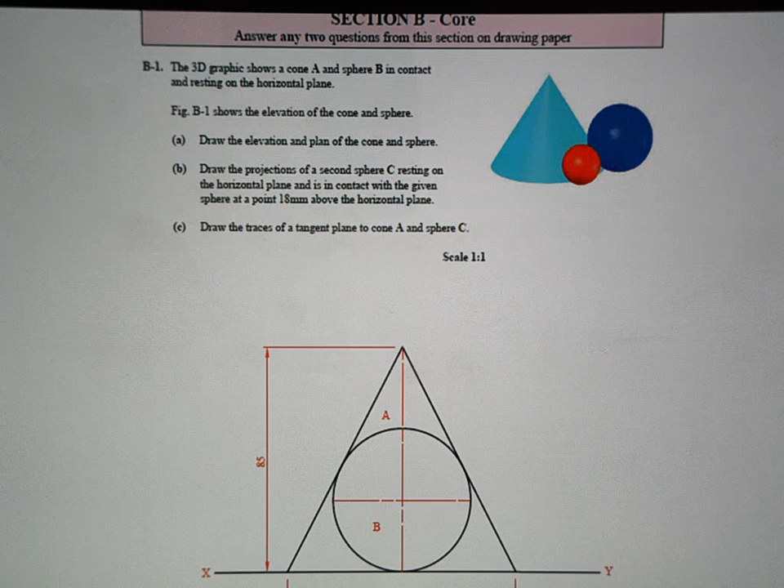Okay, just taking a look at this solids in contact question. It was one of you requested it on Edmodo, so I'll have a look at it now. You're given the elevation of a cone and a sphere B, which is directly in front of it. The elevation is given, measurements are given, and you draw a plan view from that. So part A of the question is pretty straightforward. The query related to part B and part C, so we're going to take a look at those now.

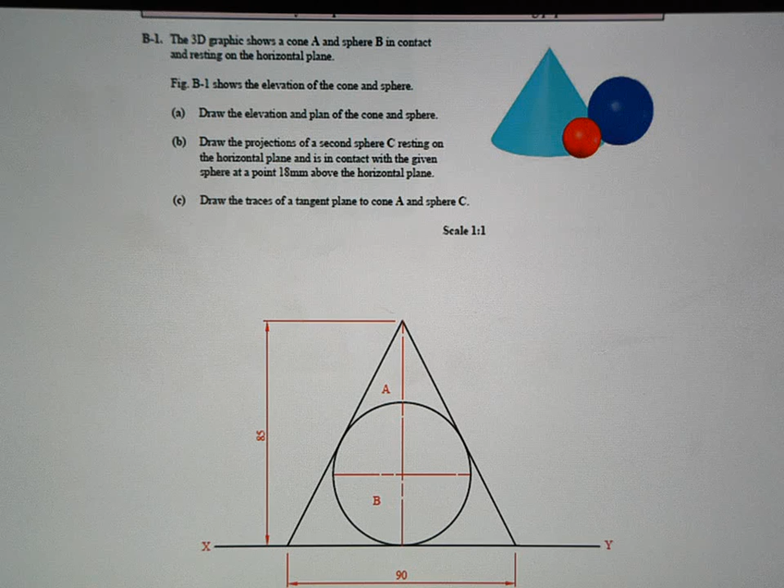So in part B, what they're asking you to do is to draw a second sphere resting on the horizontal plane. Now, when it says horizontal plane, that means it's resting on the ground. So this has to be on the ground, the sphere that we draw. And then the other criteria put in place is that it has to be in contact with the given sphere, which is the larger one, at a point which is 18 millimeters above the horizontal plane. So 18 millimeters above the ground.

So this is the third sphere we're going to draw, and it has to be in contact with this one, and those two have to be in contact with each other at a point which is exactly 18 millimeters above the ground. Now that doesn't necessarily mean that the radius of the sphere is 18 or anything like that. It just means that the point of contact is 18 millimeters above the ground.

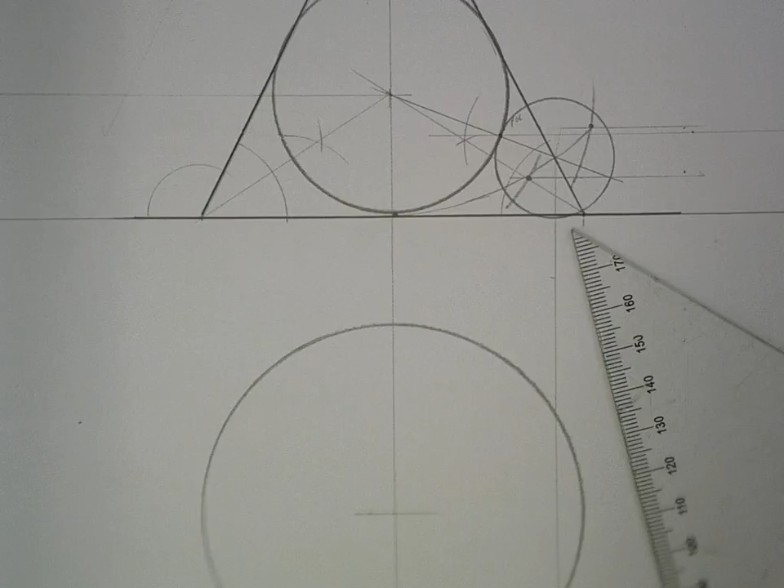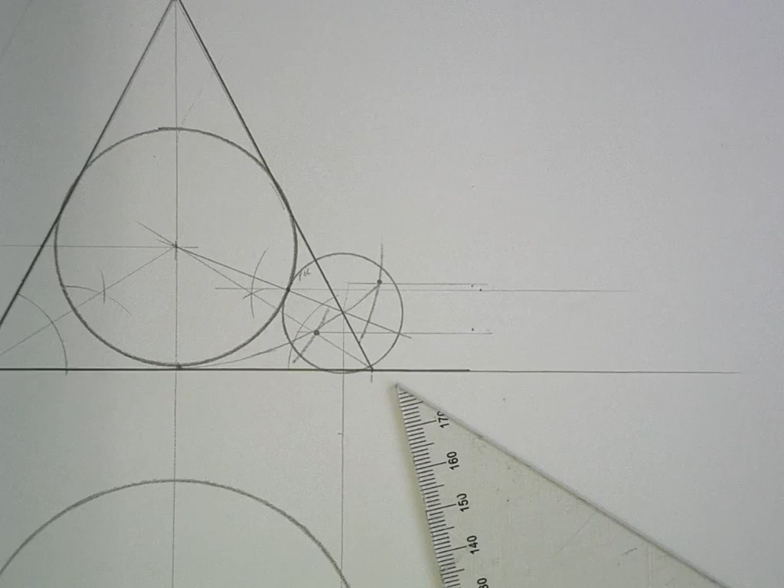So what I've done is I've drawn out the question, but I'm just going to go through it slowly now. So the initial setup should be okay for everyone. Drawing the existing cone and the larger sphere, which is perfectly lined in front of it. And now I'm going to focus in on putting in the extra sphere, the smaller one. So I'll focus in on the elevation. Okay. So what I've done is I have measured 18 millimeters up from the ground line, made a mark, and put a line across.

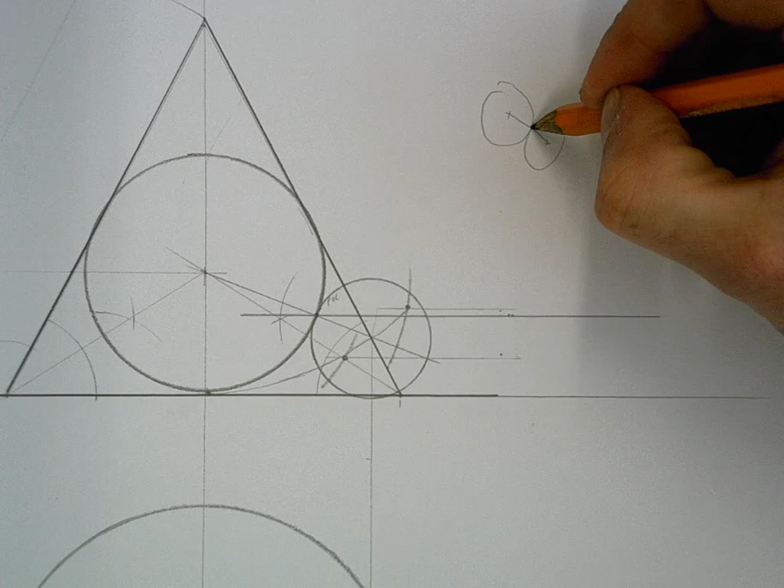Now, where that cuts through the edge of my existing sphere, that's the level at which the sphere that I'm going to draw has to be in contact with it. And when you have two circles or two spheres appearing to be in contact with each other, you find the point of contact by joining the two centres together. Okay, so that goes back to junior cert graphics. So what I have in this case is I have the centre point of one of the spheres, and I have the point of contact.

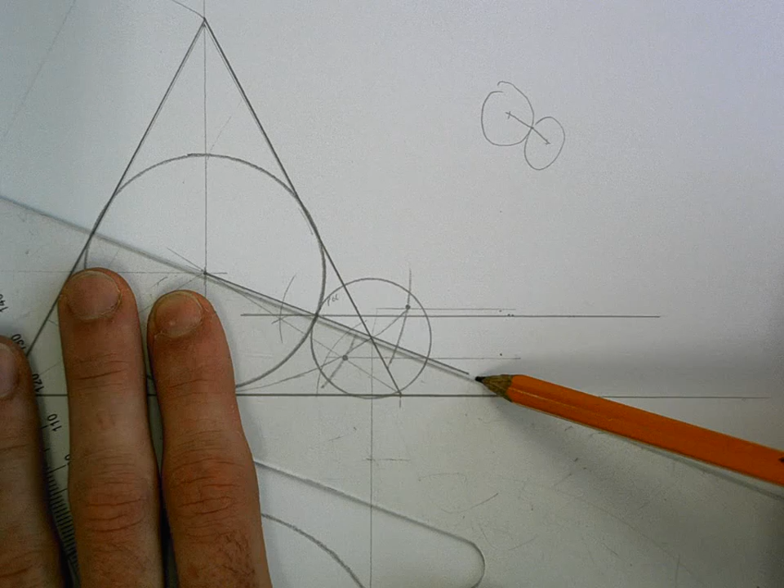So I'm going to draw a line going through those two, like so. Now what that means is that the centre point for the other sphere has to be somewhere along that line. So we're going to try and find the centre point of it. All we know about it for now is that it's along this line somewhere. Okay. What I've done then is I've created a loci. Now a loci is basically just a path that centre points can take.

So I've started off with the radius of the existing sphere, and I set that. Now what I did then was I added 10 millimeters onto that measurement. So when I brought it out by 10 mil, I struck an arc. And at the same time, I measured up 10 millimeters from the ground and drew a line across, and they intersected each other. So that would be one possible location for a circle or a sphere that will be touching the ground and touching this sphere. But it's not on the line that I want, so I'm going to keep going.

So I'll take a series of samples, and then they'll begin to create a path or a profile for it to go in. So then I go back to my sphere. I added 10 on the last time. I'll add on another 10 and strike another arc, and this time measure up 20 from the ground. Draw that line coming across. Now again, that can give me a sample centre point. If I drew a sphere from there, it would be in contact with the ground and with the sphere I have, but it wouldn't be in contact at that particular point, the line that I want.

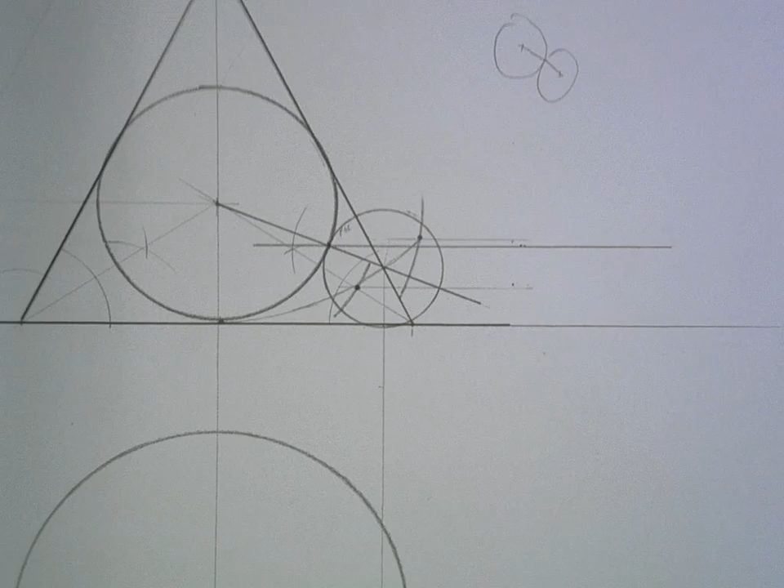But what I can do is I can create a path between those two, starting at the base here and just curving it around, and that path is known as a loci. Now that loci that I've drawn crosses over the line that I need my centre point to be on. So that finds it for you in elevation. So that's my centre point, stretch it back to where my point of contact is, and draw the elevation of your sphere. Then to bring that down to plan view, I just drop down the centre. I put them touching side by side.

But you could, if you needed to, you don't have to in this question, but in some other question you might have to maybe take that as a sample position and then move it back towards another shape. You didn't have to do that in this question, so I just put them side by side. Okay, so that completed my plan view for me.

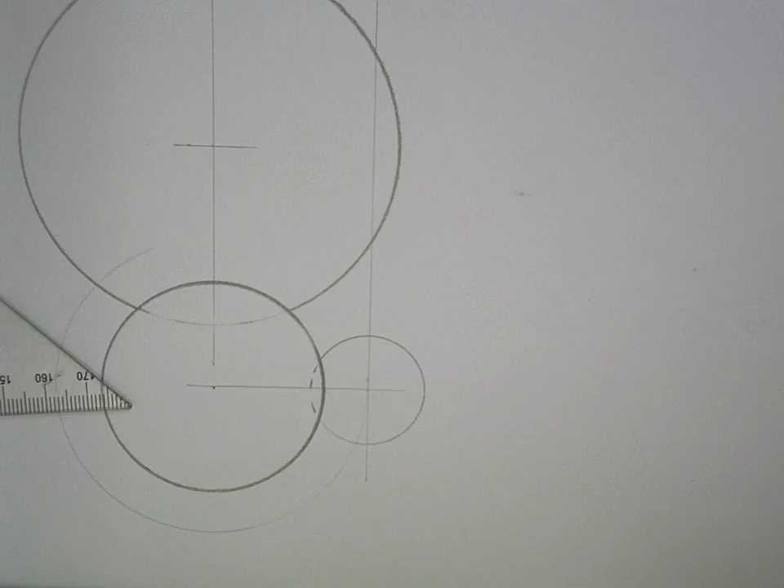Now to go back to the question, looking at part C, which I have to go through as well. So we look at part C of this question. What they want you to do is to draw the traces of a tangent plane. Now a tangent plane just means it's touching against whatever they're going to specify, so it's the same as we're usually working with. We're looking for a horizontal trace and a vertical trace.

And the two shapes that we're dealing with are the cone A, which is the original cone, the large one, you can see it here, and sphere C, which is the one that we just drew. Now just another pointer before I go and answer this. You obviously need the answer from part B to attempt part C, because you need sphere C.

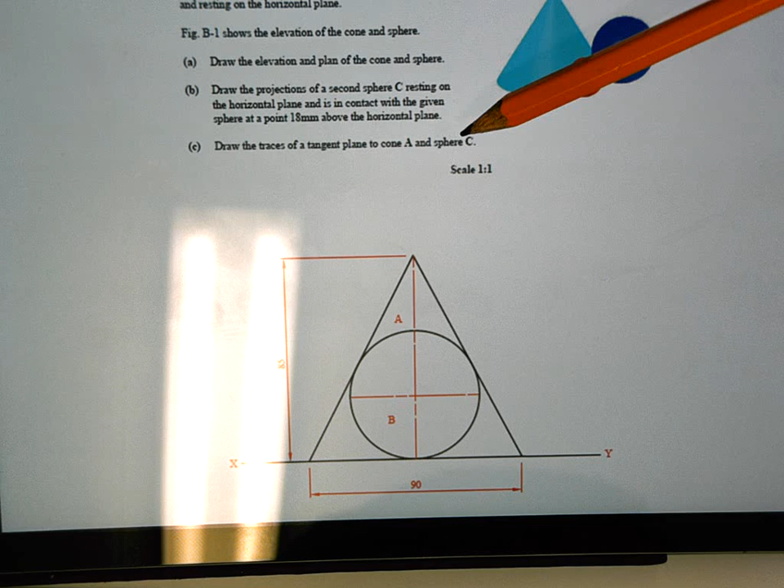If you for some reason weren't able to figure out part B, you would just put an estimate of what you think it would look like, carry on, and then if you get the procedure for part C correct, you still get the marks for part C. So if you're ever stuck like that, just make an estimation of what you think it should look like, continue on, and you might still get a good bulk of the marks.

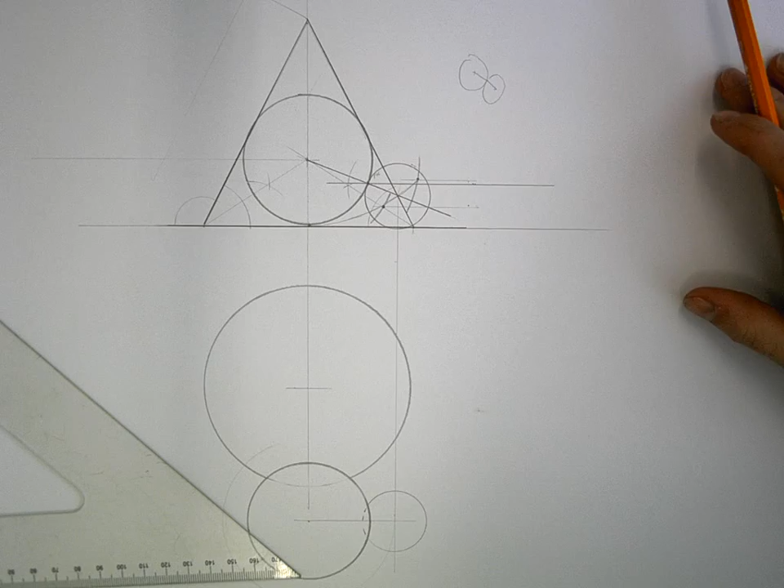Right, I'll just zoom out for this because I want a view of both elevation and plan. Now the procedure for this is quite simple. What we're going to do is try and put a cone over the sphere that I have, because if you have two cones, it's quite easy to rest something against them, and what we want to do in this case is rest a plane against them, and we can get the traces of the plane after.

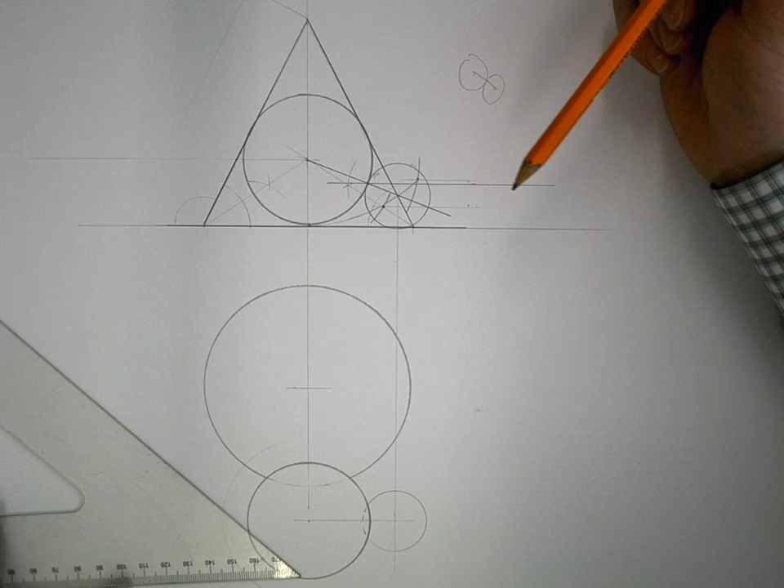So what we'll do is take the sphere C, the smaller one here, and we're going to put a cone which has the same angle as my existing cone on top of it. So all that's going to mean is, in elevation, getting the angle of the cone, the pitch of it, and just sitting it on top of that sphere that I have. Okay, and we go in both directions, just so you understand what I'm trying to do.

So now that I have two cones, it's going to be very, very easy to rest a plane on top of them. And it'll be in contact with the sphere because the cone that I drew is just tangential to that. So when I put the plane on top of it, it'll still be touching the sphere. The cone is just an imaginary thing that we put in to help us get the angle right.

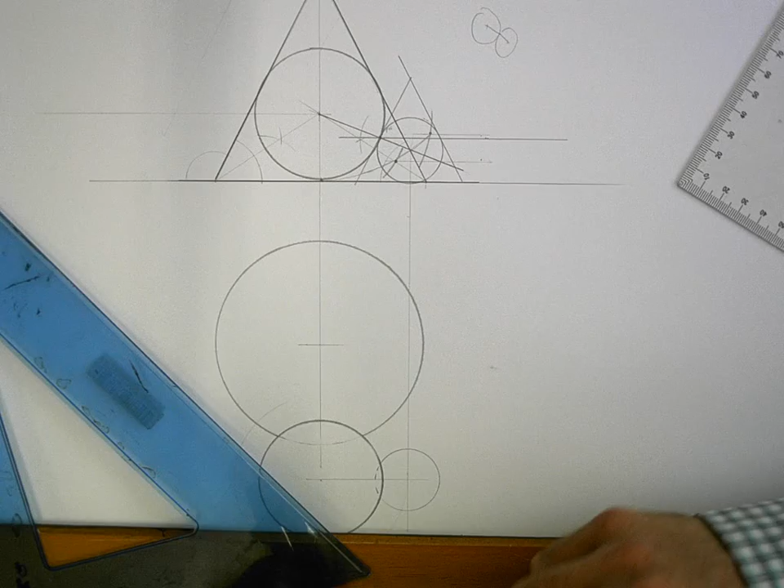So what we'll do then is take the cone that we've just put over this sphere and bring it down to plan view and draw it down there. Now as you know, a cone in plan view just looks like a circle. So get the radius of your cone on the ground and have it sitting on top of that sphere down in plan view.

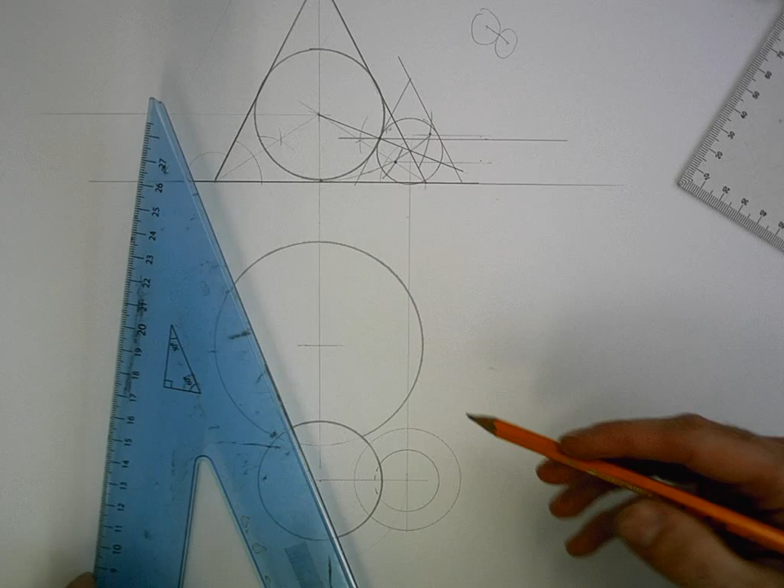Now when you have two cones and you rest something against them, the horizontal trace is just going to be tangential to the two cones. So I could do a horizontal trace going in that direction, probably the most sensible way. Or you could also put one going up that way. Okay, it wouldn't make any difference, to be honest. I'll just put it here to keep the drawing tidy. So I'm tangential to the edge of both of them on the ground. That's my horizontal trace.

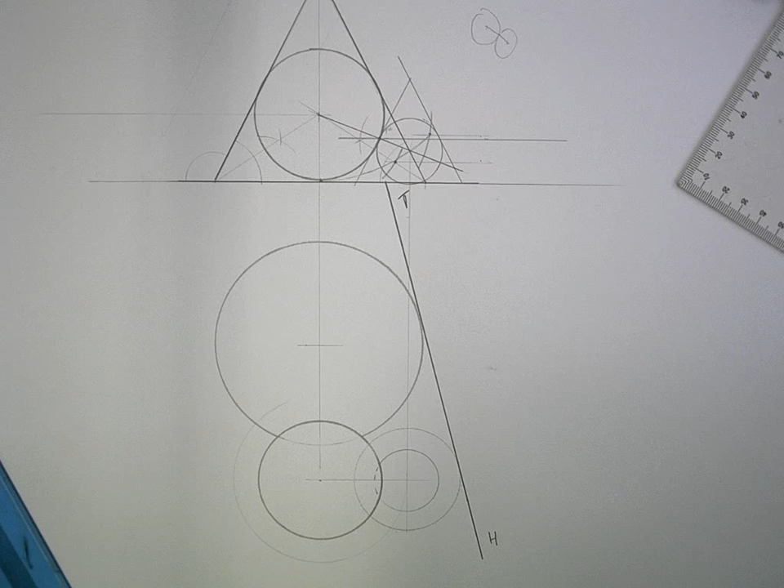The vertical trace is found, as we always do. Once you get your horizontal trace, go to the highest point of what you're talking about. So in this particular case, we're talking about two cones. One of them is higher than the other one, so go to the highest point here, the center point of it, and replicate the angle. So that's my horizontal trace angle.

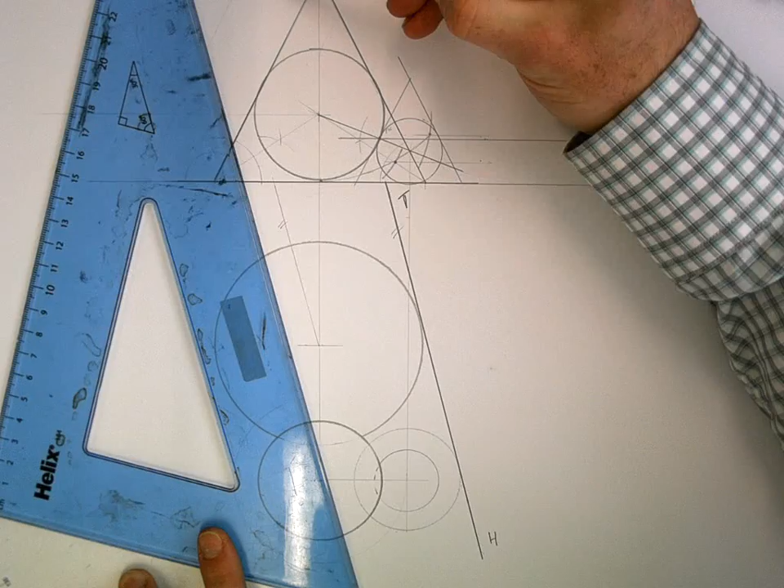Slide it over. That's it, replicate, so they're parallel to each other. And then just bring that up and take a height reference over from it. And that is the vertical trace.

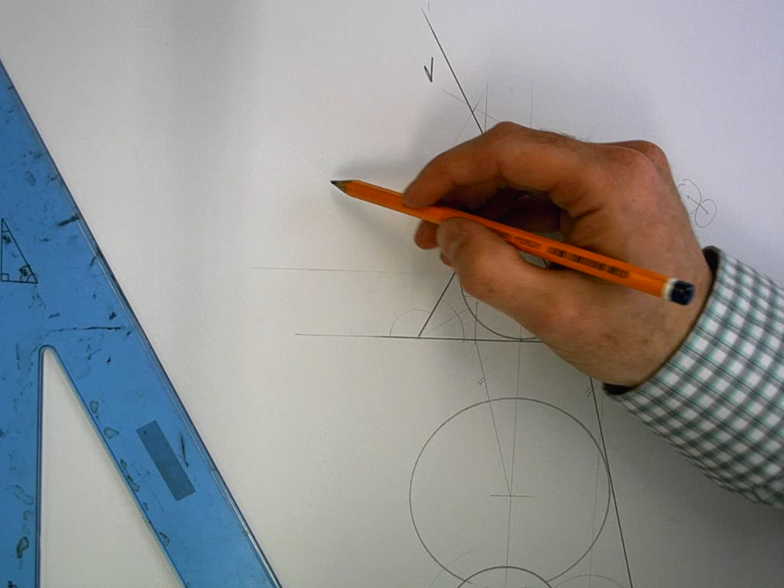Okay, so essentially what we've done there, I'll just do a really quick sketch to try and help explain it. So what I'll draw out is, let's say we have the corner of a room, like so. So that's your back wall, that's your ground, and let's say we sit two cones on it. Okay, and we put maybe another cone a bit closer.

Now, if we were to sit a sheet of glass on top of those two cones, it would rest against the ground tangential to the two of them, like that. And it would be pitched, obviously, at whatever angle the cones are at. So that's essentially what we did. That's our horizontal trace, and as we're looking down in plan view, we just see that as a single line. And then the vertical trace, the VT, is as we're looking in for the elevation.